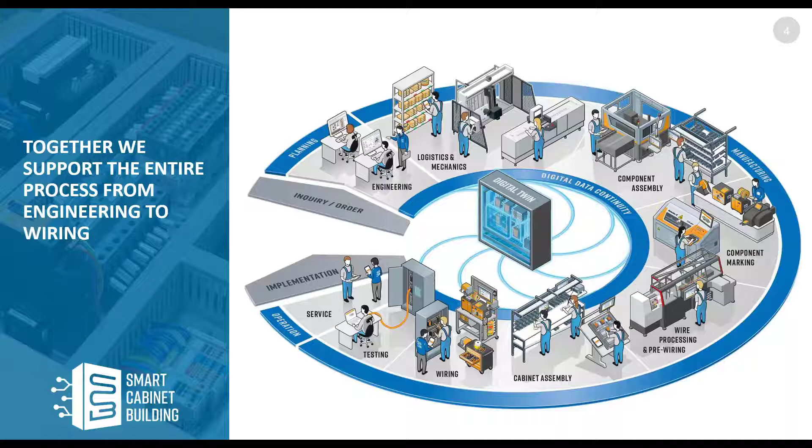Before we come to the machine itself, I want to highlight the initiative overall. As you're hopefully already familiar with, Smart Cabinet Building consists of Weidmüller, Komax for the topic of automated wire processing, Zuken in the field of digital engineering for cabinet building, and Armbruster engineering for the assistance systems for manual production. Our approach in Smart Cabinet Building is that together with all four partners we support the entire process from engineering to wiring.

What is the benefit for you? In the end, Smart Cabinet Building offers you integrated solutions from engineering to wiring, more or less out of one hand. This solution can range from manual tools and assisted solutions to fully automated solutions. Based on that, we are able to provide you exactly the right solution for your individual needs, for your individual requirements.

And all our solutions are already available and tested in practice. That is important to keep in mind for the videos and presentations I want to show you later - everything you see is already in daily use. Based on that, I would start with the approach of Weidmüller in the field of cabinet building overall before we come to the RailAssembler and RailLaser.

So first of all, we already saw the blue circle of Smart Cabinet Building. Weidmüller set up roughly 3 years ago our own orange circle, because in the Weidmüller family we now go more and more in the direction of workplace solutions, where we don't focus on individual products but try to provide you solutions for the full circle in cabinet building.

That means, for example, that we provide manual solutions, like hand tools for crimping or cutting. Then we have semi-automated solutions, for example the wire processing center, which will be presented in the webinar in February next year. And for sure, we have the topic of fully automated solutions - the RailAssembler and RailLaser, the topic of today's webinar.

For a lot of customers, it's a question if they really want to invest in the machines, or if there is an alternative to participate in the improvements of automation and digitalization in cabinet building without having any kind of these investments. And our answer is: yes, there is a way.

You can make use of the automation that we did in our own factory at Weidmüller, based on our fast delivery service for assembled and marked DIN rails.

For sure, the topic of data preparation is very important. And also therefore we have the Weidmüller configurator, which has automatic interfaces to ECAD systems, especially this one of our partner Zuken. Online documentation overall is also available and one part of our workplace solution approach.

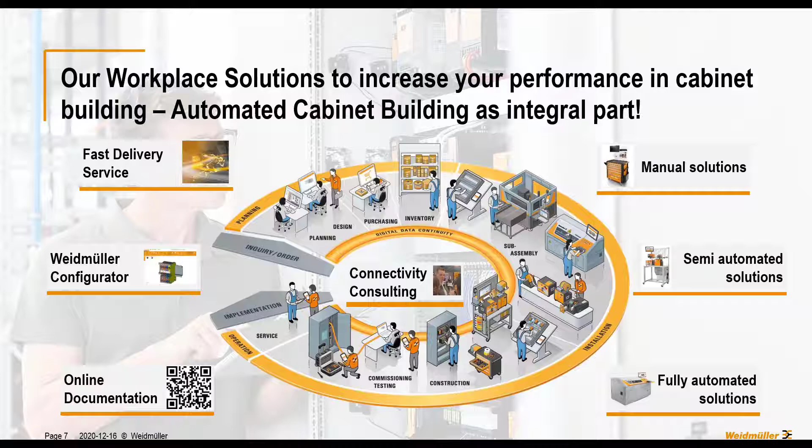In the end, we are talking about more and more different solutions on the product level and on the machine level. To support you there, we have also set up our connectivity consulting since several years, which helps you find the right solutions for your individual process. And based on that, let's have a deeper look.

Let me first highlight why the combination of components and machines is so important. Because from our point of view, to gain a new level of productivity in your cabinet building, it's only possible based on the perfect interconnection of components, digital data, software, and the automation solution itself.

So for example, if we have a look in the component area, we are talking about ready-to-robot components. What does that mean? I want to explain on the next slide.

Then we have the topic of further services. For example, if you want to go in the direction of fully automated marking, it makes sense to have pre-assembled markers already on the terminals, so that you don't have to put them on yourself. Just order a special article and you will receive terminals with pre-assembled markers on them.

Then we also have the topic of optimized packaging. For sure, if you have any kind of assembly robot, it makes sense that you don't have to put all terminals individually in a magazine. It makes more sense to have an optimized packaging, which makes it as easy as possible for you.

Further, virtual product data is very, very important. For sure, all our machines will do exactly what you specify in the data, and honestly that's also a big hurdle, because you have to have the right information in there. How you can easily come to this point is also part of several webinars in our Smart Cabinet Building Initiative, for example with the ECAD system, or you can also start with the Weidmüller configurator to generate your individual DIN rail.

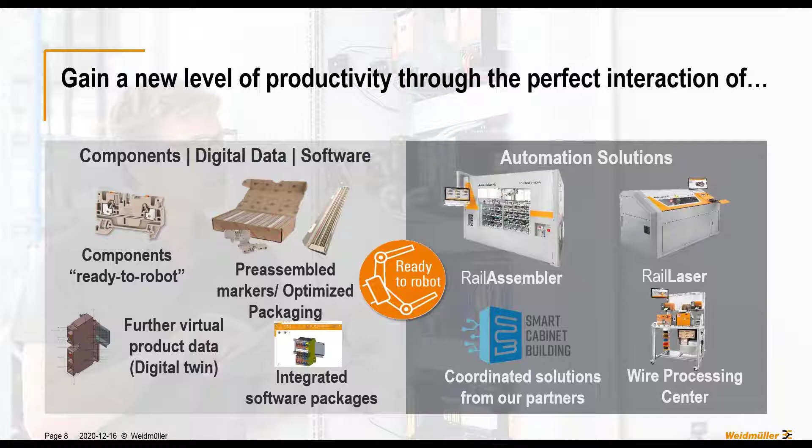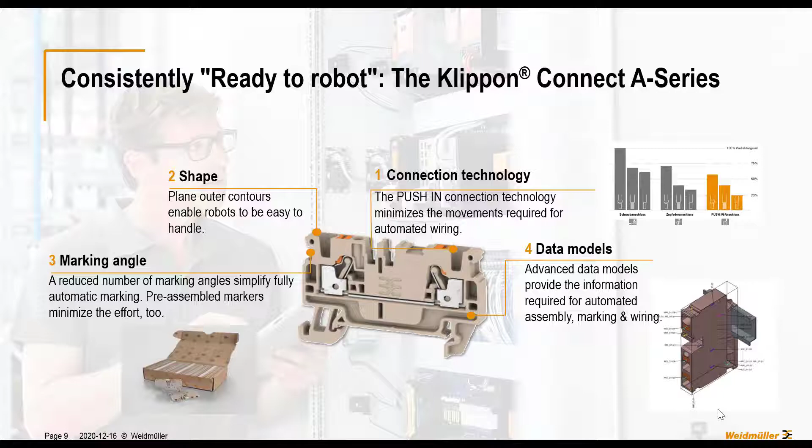Overall, we can say that this topic—components, data, and software—you are hopefully already familiar with, and for these topics you know Weidmuller already.

If we look at the other side, automation solutions, that is more or less the new area. We have the RailAssembler for the automated assembly of terminals on rail, the RailLaser for automated marking, and the wire processing center for semi-automated cable processing. We also have coordinated solutions from our partners. We will see later in the presentation, for example, how we can link the ECAD system from Zuken with the Weidmuller configurator, or how we can implement assisted workplaces from Armbruster in a nice way, so that we have a smart way to deal with the required variety of variants in the field of terminal block assembly.

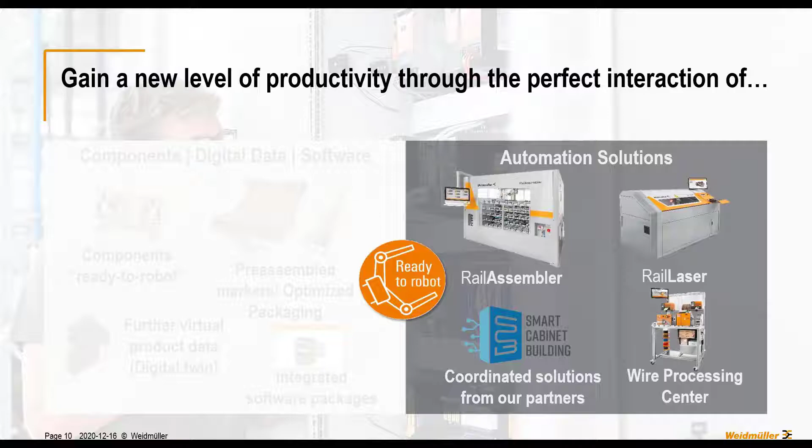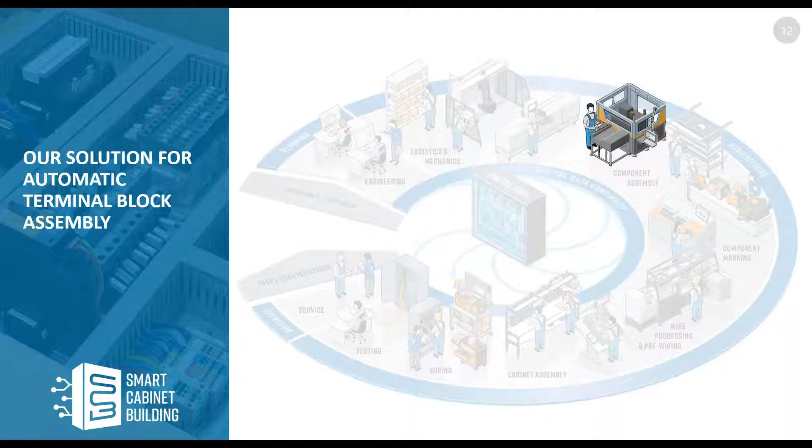Based on that, let's move over to the RailAssembler and look at the process step of fully automatic terminal block assembly. To give you some insights into the machine, let's start with a short video.

This is a video from our smart cabinet building days in the Czech Republic, which we conducted based on Corona restrictions in September this year, where we showed selected customers the overall approach of smart cabinet building and, for example, the RailAssembler.

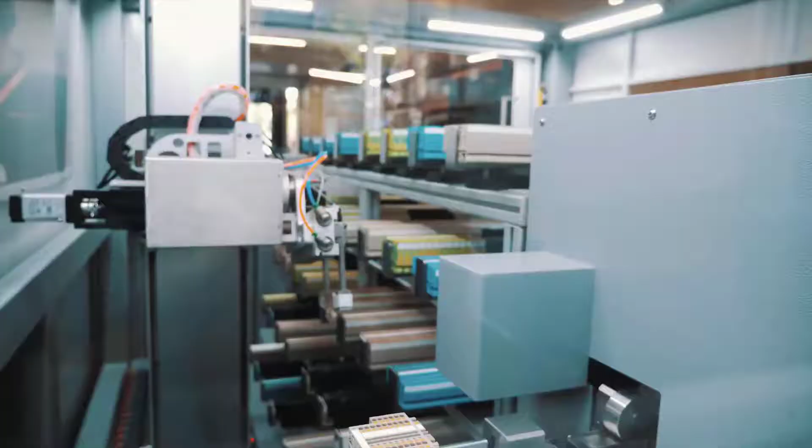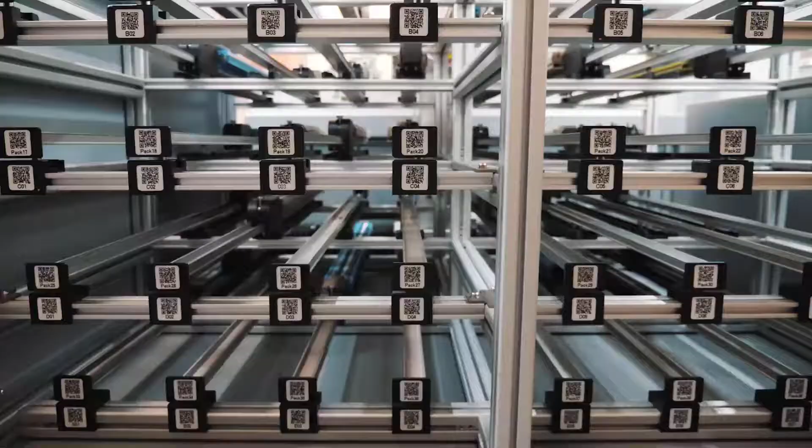The RailAssembler is our answer for an economical automation of the terminal block assembly process step. The machine has 40 magazines for terminals and 18 magazines for pre-cut DIN rails. As I said, the target was to define a robot that also makes sense from an economical point of view. That's why we defined some simple but very smart component magazines, which consist of a reduced DIN rail profile. Based on that, we have the advantage of universal contours that can be handled with this kind of magazine.

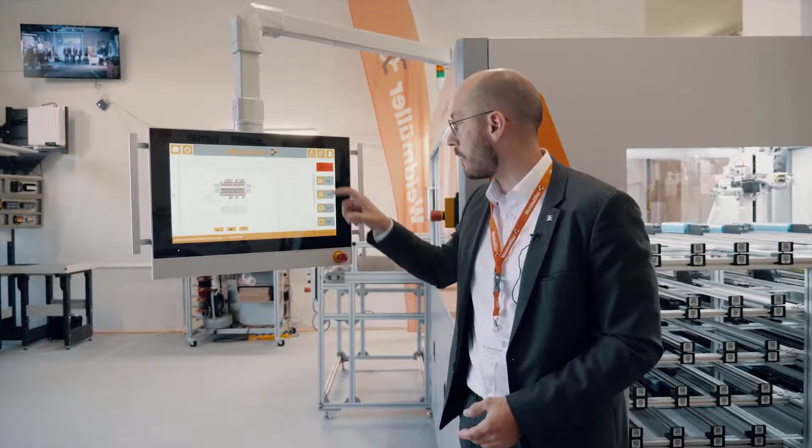Everything is steered or controlled based on the digital twin from the Weidmuller configurator. This configurator has automated interfaces to ECAD systems like Zuken. So if you just load the file, fill in all the terminals required for your production order, and fill up the DIN rail magazine, you just have to press the start button and the rest is done fully automated—again, also involving the topic of gripping different contours.

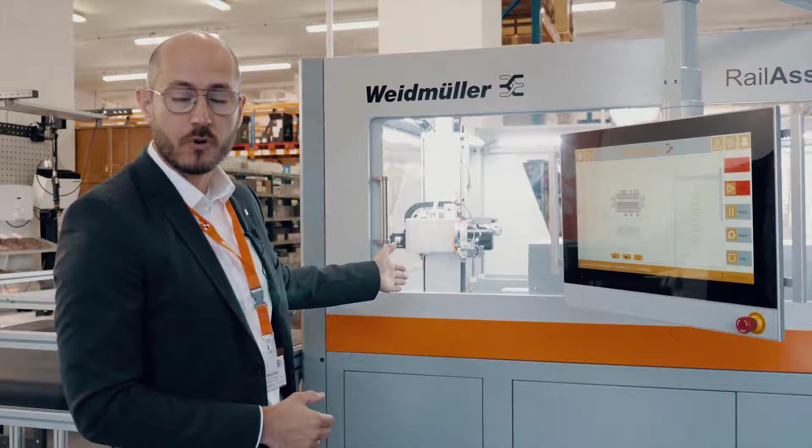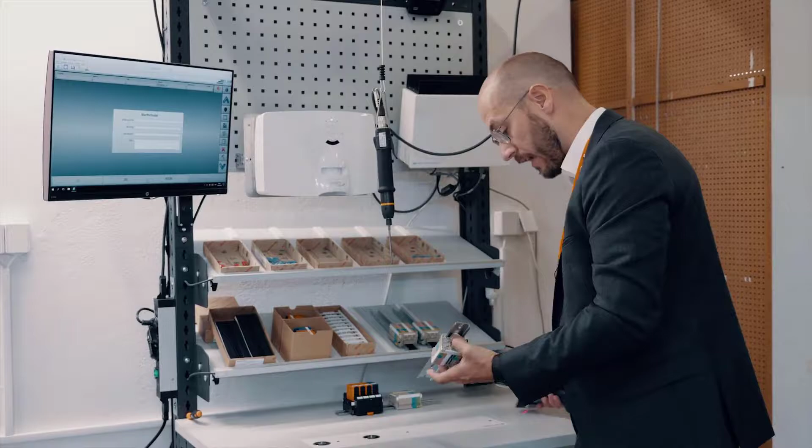For sure, we go in the direction of ready-to-robot, but we are aware that you have also some components to handle which aren't designed that way. That's why we have a gripper which consists of several slices. Our approach is that the RailAssembler should handle the high runner components, while components that are less common or can't be handled via a robot should be assembled at an assisted workplace with our partner Armbruster. You see it here in the video.

So the high runners are already assembled. We scan a code on the back of the DIN rail, and the workstation knows which component is missing. We show the operator how it has to look, where he has to grip, how many pieces, and where he has to place them. We even have a screwdriver connection there.

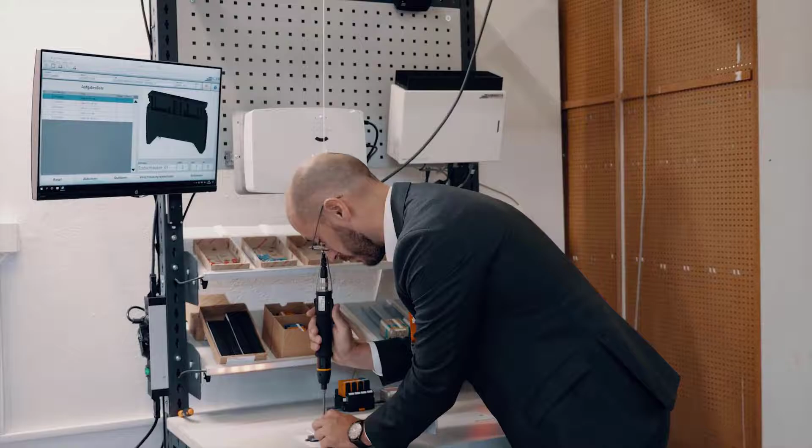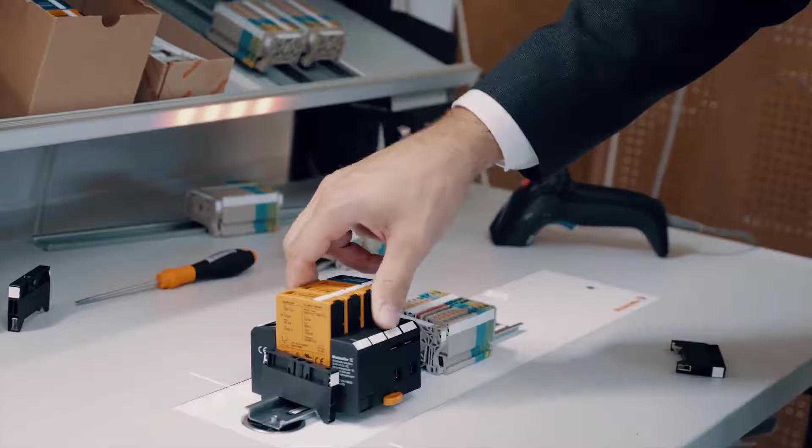We measure the torque for each screw and protocol it in a digital product lifecycle archive. That's a very smart way we can bring all the information specified in the digital twin to the operator, for example, the topic of cross connections.

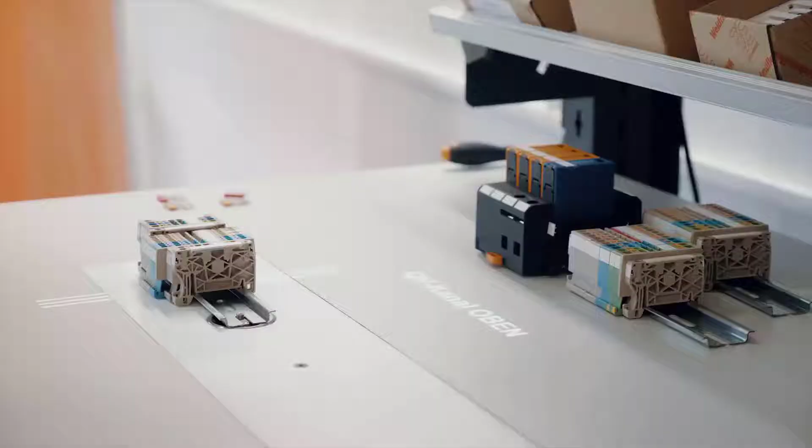We saw we have 5 pins, but only 3 should still be there. Based on the projection, we show the operator which pins he has to remove. So that is more or less the approach which makes most sense from our point of view.

Before we come to the next process step, I want to highlight some functions of our assembly robot. Overall, you can have an efficiency increase in your cabinet building in the field of assembly up to 60%. This efficiency increase comes especially from the area of individual commissioning of all the components or searching for the right position.

For sure, the snap-on process itself, a human is even faster than a robot, but overall we're talking about time savings up to 60%.

An advantage is also that you can have several hours without manual interaction. So if you load up all the magazines in the morning and book all the production orders on the machine, we're roughly talking about 6 or 7 hours where no manual interaction is required.

Then we have the topic of seamless connection between engineering and assembly, because we directly use the information that the engineering colleagues specify in the digital twin for the production. Based on that, we can have reliable and high quality component assembly.

As I said, our target was to define a simple and smart solution, so you have a quick payback depending on the volume. From our point of view, the RailAssembler is the solution if you are producing roughly 200,000 terminals per year.

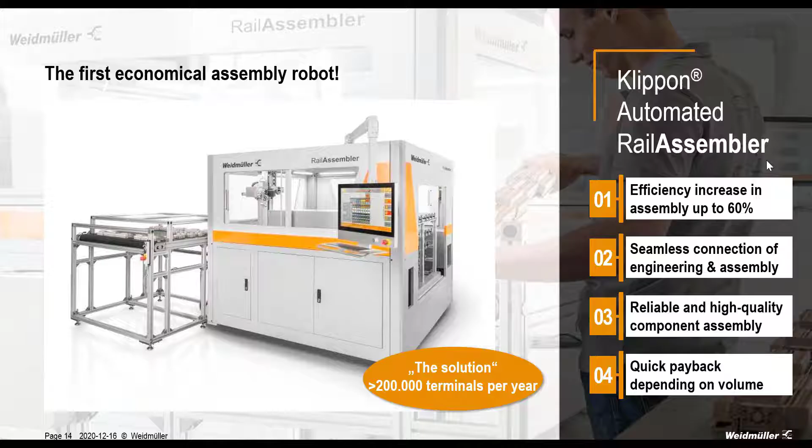If we look at some other highlights, we already discussed reliable quality—you see the preview for the operator based on the digital twin of the Weidmüller Configurator. We have the contour-robust gripper, which consists of several slices, and based on that we can handle the ready-to-robot components, the preferred way, but also some other components.

We have consistent transparency through several booking steps. We scan the package of the terminal, we scan the magazine where we put the terminals on, and we scan the magazine position where we put the magazine. In the end, we have really high transparency all along the production order, and we can guide the operator through several operations, for example which components are missing for the next production order.

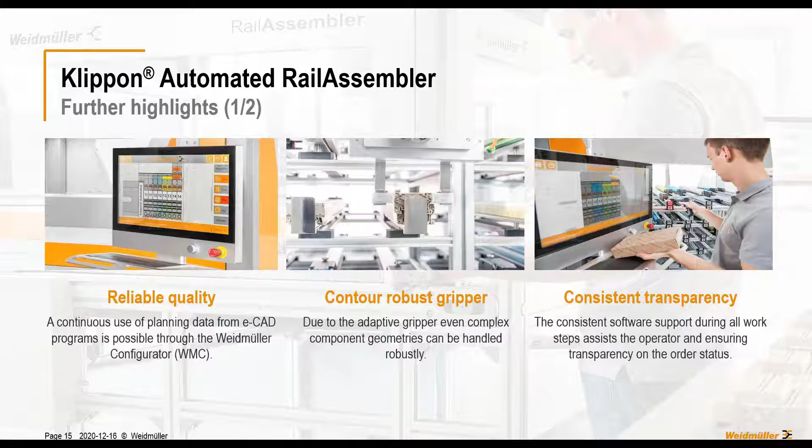Then the topic of flexibility is very important in your daily production. That's why we have universal magazines that consist of a reduced DIN-rail profile, so you can put nearly any kind of contour on the same magazine. For example, if you have to change your high runner assortment due to a big customer order, you don't have to buy a special magazine—just load the terminals on the magazines you already have and start production.

Also for the pre-cut DIN rails, for these 18 positions, we have very high flexibility because you can load the DIN rails with a length of 100 up to 1,200 millimeters. If you have only short ones, you can put several on the same magazine position. So in the end, we're not just talking about 18 places—we're talking about a loading volume of 18 times 1 meter 20.

And in the middle, we have the topic of handling. So we have longer DIN rail magazines that enable you to put 200 pieces of a 2.5 square millimeter terminal block on one magazine, so that you don't have open quantities. Also, based on the reduced DIN rail profile, even during transportation and filling, no terminals can fall down or fall out. That may seem minor, but based on our own production, we're sure it's one of the bigger things that ensures operator acceptance.

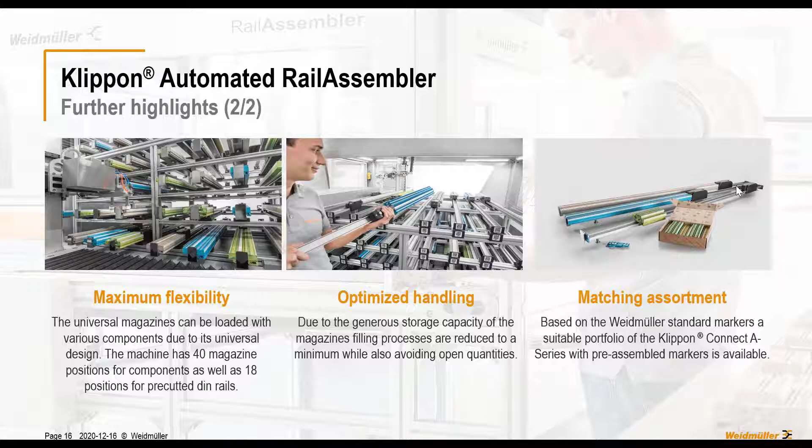And as I said at the beginning, our target is to have the matching assortment. So the assembler is able to handle other components too, but for the Klippon Connect A-Series, we provide, for example, versions with pre-assembled markers, or as you saw before, special packaging, as well as some other services.

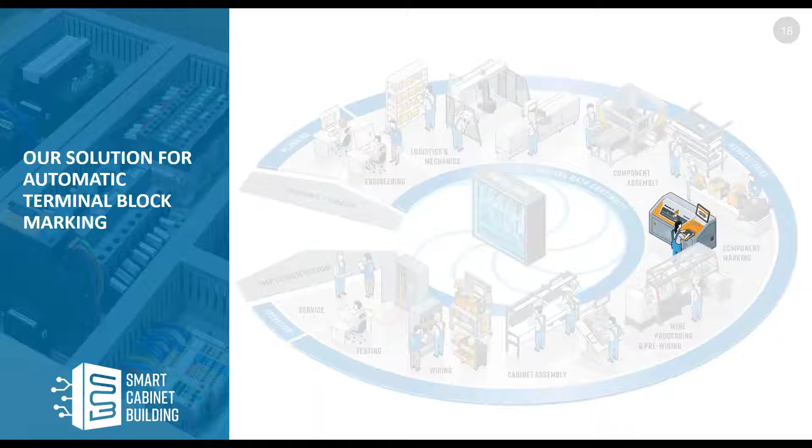So that was the topic of assembly. Remember, RailAssembler for the high runner components and Armbruster workstations for the other components which are more difficult to handle, or which have to be screwed, or are not so common in use. Our idea is that after you equip all the components on the DIN rail, you just put them in the RailLaser and do the marking process also fully automated.

To show you this, I would also like to start with a short video.

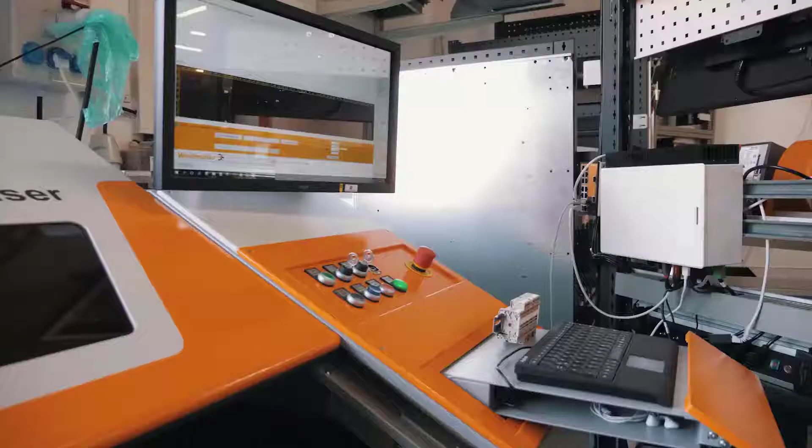So also this machine we showed to our customers during the Smart Cabinet Building Days in Brno. The RailLaser can also handle DIN rails with a length of 100 up to 1,200 millimeters and a total weight up to 15 kilograms. As you can see in the video, we directly produce the DIN rails with the RailAssembler and later put them directly in the RailLaser.

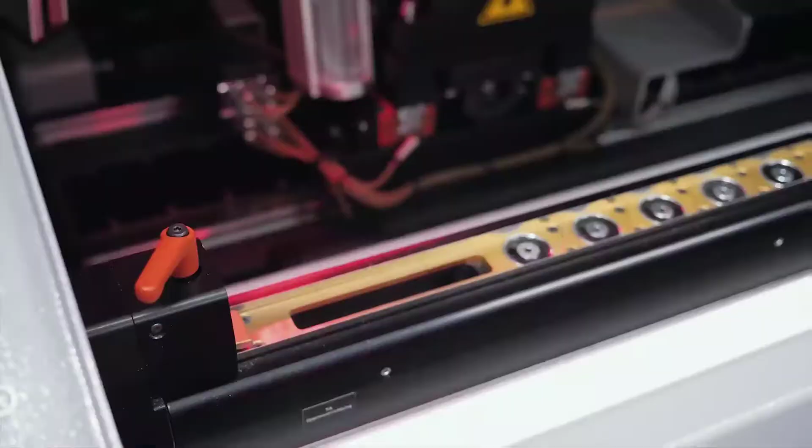So we use our A series as a DL version. You see the blank markers on the terminals. If you are using this kind of component, the marking process only consists of putting the DIN rail in the machine, fixing it, and pressing the start button.

And then we have a unique image processing inside our RailLaser. This image processing takes several pictures from the DIN rail and checks the real position of each marker, compares this position with the position in the digital twin, and fully automated does the required adjustment. So we can really be sure that we mark directly in the middle of each marker.

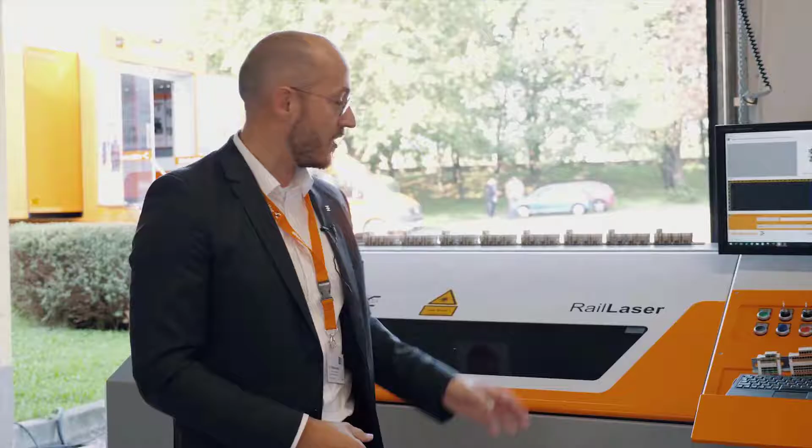And the machine has also some further advantages. So we will now see, for example, how we can open one of the production orders. For sure, you can also scan it. So there we can have a failure minimization based on the digital value chain. But also, for example, the marking itself has some advantages. It's quite robust due to the direct marking, and the sharpness of the contour is also very high.

So that was just a short overview. To give you some more detailed information, we will come back to our presentation.

And there, first of all, I want to highlight that based on the RailLaser, we are talking about time savings up to 90% in the area of marking. And that is for us the reason, honestly, to speak about the next level of fully automated marking when we come to the RailLaser. The machine also enables you reliable quality and data consistency, because as you can see on the screen, there we are using the digital twin of the Weidmüller configurator. Then we will see later in the video how fast the lettering itself is conducted.

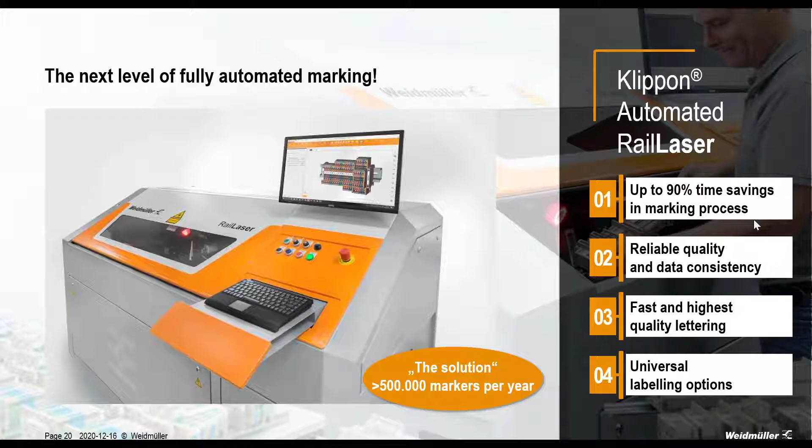And also the topic of universal labeling options I'd like to explain to you later on another slide. Also there, the question is, when does a RailLaser make sense? From our point of view, the RailLaser is the solution if you have roughly 500,000 markers per year to mark. And please also keep in mind that we are not only talking about terminals. You can see in the picture on this slide that we can also mark, for example, shock protection and some other components, so nearly the same size as a terminal, then also the automated marking is possible.

The topic of reliable quality I already explained to you. We have the robust marking through the direct marking of the marker. So we not only mark on the top of a marker, we have more or less the color inside the material, and based on that have really a maximum level of robustness.

And we have the topic of universal marking options, because based on our laser source, we are able to use our standard marking material. So you don't have to buy special markers if you want to go the way of the RailLaser. And that for sure is a good thing for your own internal supply chain and logistics, because you can use one marker for any printing technology. So if you want to print in color using an inkjet, you can use the same marker as for the RailLaser.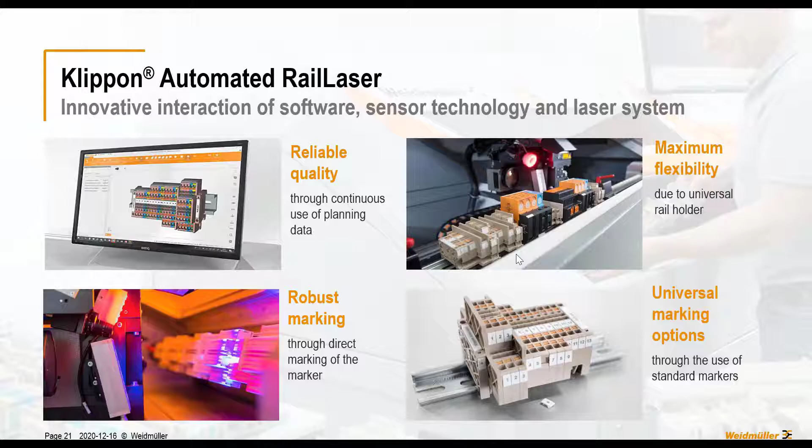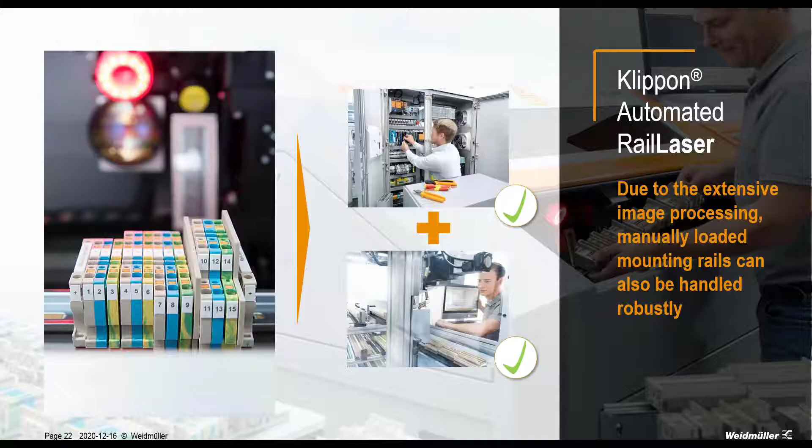One highlight, as I already said in the video, for sure is our image processing. And based on this image processing, it's possible that our RailLaser can handle manually equipped and automated assembled DIN rails in the same level of robustness. And that I would like to show you in a video where we have an insight in our machine.

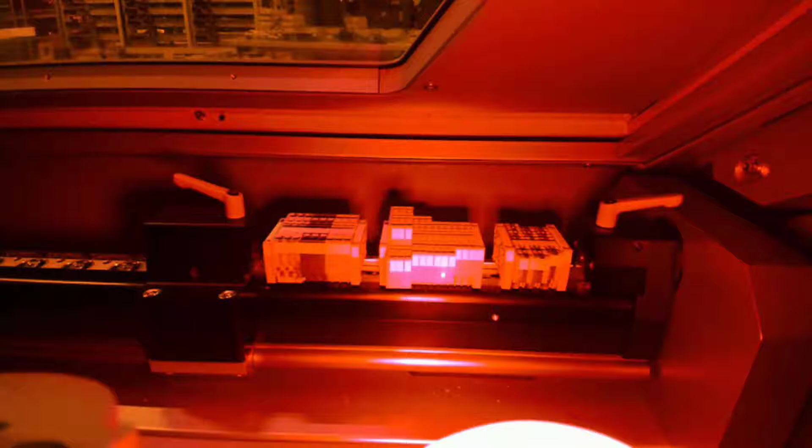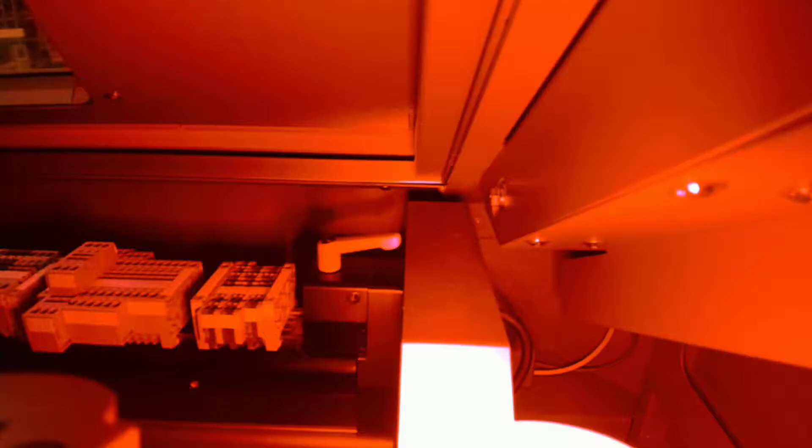So here you can see a configuration which consists of different sizes of terminals. And first of all, as I said, the image processing is doing some pictures of several sides of the DIN rail. And we are checking for each marker the position, compare it with the position in the digital twin, and we're conducting fully automated the required adjustment.

And the number of pictures that we are doing is in relation to the complexity of the component. In this sample that you can see in the video, we are taking 3 pictures, so 3 sides, and then we are starting directly the marking process.

And one thing is important. During the image processing and the process of the marking itself, we are generating several printing layers. And that is very important because, for example, you can have the setup that you have a very high terminal, then you have a very small terminal, and again, a very big terminal.

Based on this printing layout, we will separate it and we will adjust the position so that we really can be sure that also in this kind of a valley, we will reach really the marker, and you can really mark the maximum level of lettering size on this marker also in this kind of a valley.

Yes, we see now here in the video how the laser is doing the marking process. We come now more and more to the final part of the marking. Only two sides of the last block are still missing. And based on that, I think you get an impression how fast the marking is and which time savings you really can have based on this solution of a fully automated marking system like the RailLaser.

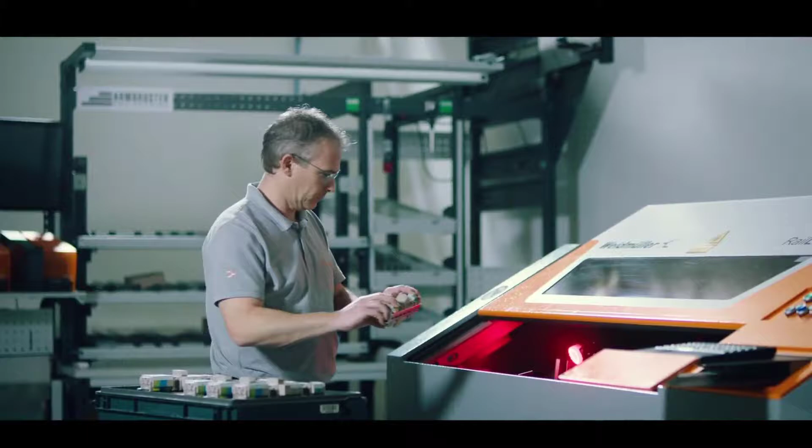So just a short scene out of a video that will be uploaded in a few weeks also on the internet. And there you can see again the missing markers, how we show it to the operator, how the operator then can add the missing markers and having in the end the final result.

So just as a short summary, for sure you can have big time savings into the RailLaser, but I think especially this topic of integrated quality inspection or having a good friend that is taking care is really an advantage of this machine.

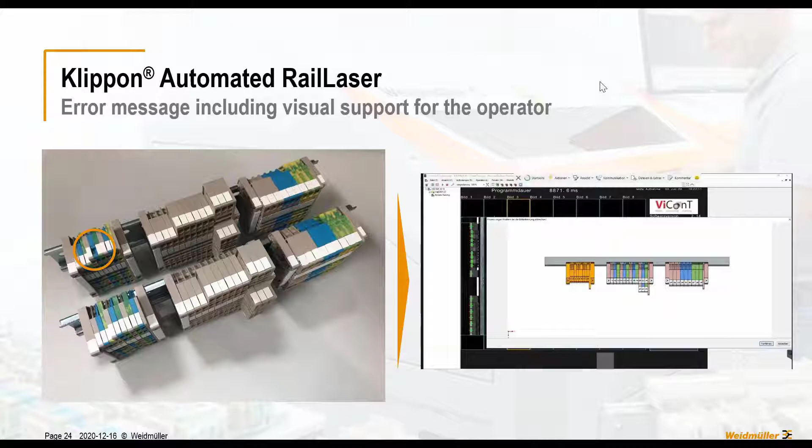In the end, as I said at the beginning, from our point of view, the Klippon Connect A-Series, especially with the pre-assembled markers, is a perfect complement.

You can order the special version, then you will receive the terminals with the blank markers on it. And we have already roughly 160 articles available, and further versions will follow during the next months.

The good thing is you can easily replace these markers. And in addition, for these components where we don't have a standard version, you can snap on blank markers by yourself and therefore use the standard marking material that you are also using for some other printing technologies.

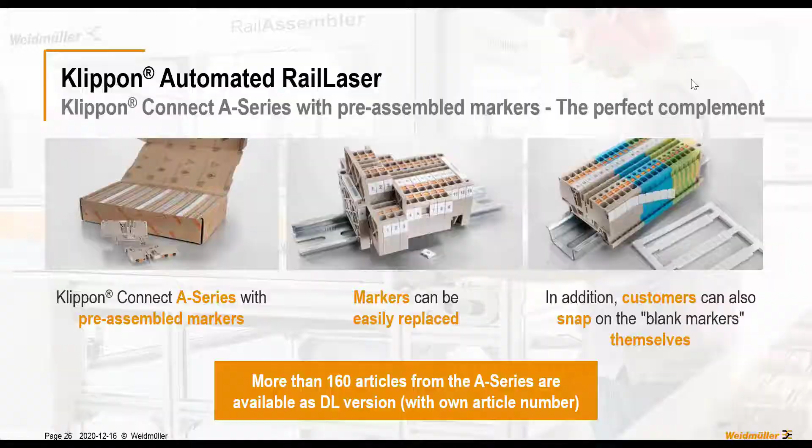So that was just a short overview of both machines.